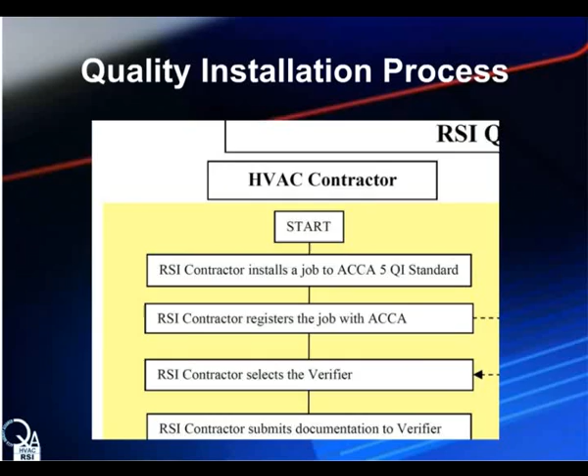Next, let's presume the QI job has been installed. Therefore, the job's documentation is to be sent to the verifier. As we saw in the last session, there is some documentation that must be forwarded to the verifier. The items required for submission are detailed in Section 1 of the Verifier Checklist.

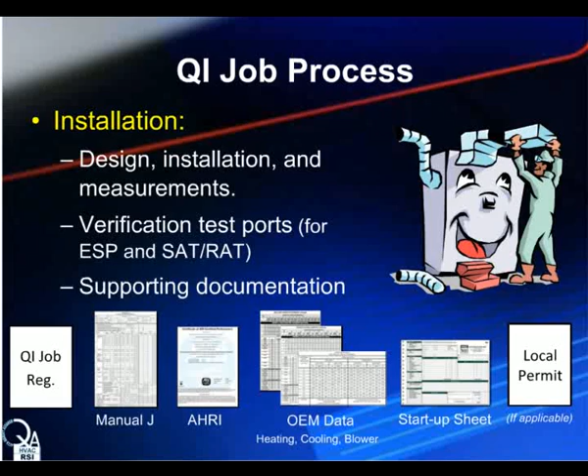Looking back at the whole flowchart to reestablish where we are in the process, let's review some of those dotted line connections. The first dotted line connection is from the RSI contractor to the QA program when the job is registered. A copy of the registration form will be part of the information submitted with the QI job documentation. The other dotted line represents the link between the RSI contractor, the verifier, and the QA program, because verifiers will be listed on the directory hosted by the QA program administrator.

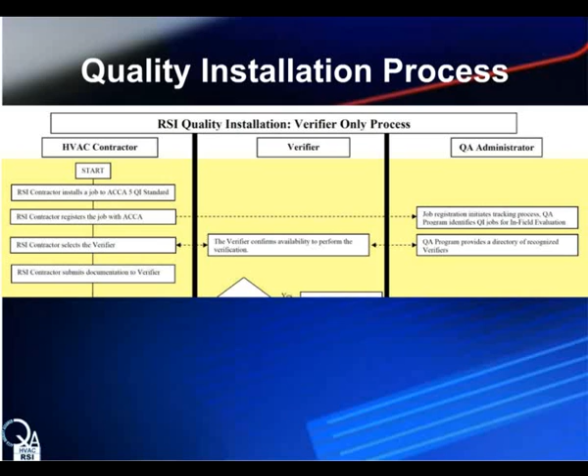So, revisiting the initial steps of the program, after the job is finished, registered, the verifier is coordinated, and the documentation has been forwarded, we will then look at the verification process.

This slide is a bit chopped up in an attempt to display the lanes of responsibility, but we'll pick up where we left off. The documentation has been submitted to the verifier. If the job is selected for an in-field evaluation, then the first Verifier Checklist, the installation file review, will be completed. Then the verifier will coordinate with the contractor and the customer to conduct the in-field evaluation. And then the second Verifier Checklist, the in-field evaluation, will be completed.

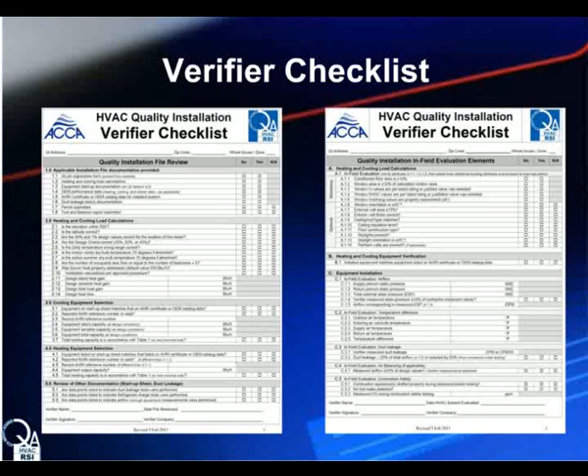This part of the process is not required to flow only in this way. It is possible that the RSI contractor will coordinate to have the verifier on site as the job is being finished. At that time, certain measurements and observations can be documented and incorporated into the final report. As the relationship between the RSI contractor and the verifier develops, it is anticipated that this process will smooth out into an almost seamless event.

The other path, when competence has been demonstrated, is for only the installation file review to be performed. Regardless of the path that is followed, at the end, the QI job either met the minimum requirements and the path continues to the right, or there were elements that required remediation and the path leads to the left.

As a reminder from the previous session, initially 3 consecutive jobs must meet the minimum requirements of an in-field evaluation. Then, 1 in 10 jobs will receive this level of evaluation. And every QI job installation file will be reviewed by a verifier.

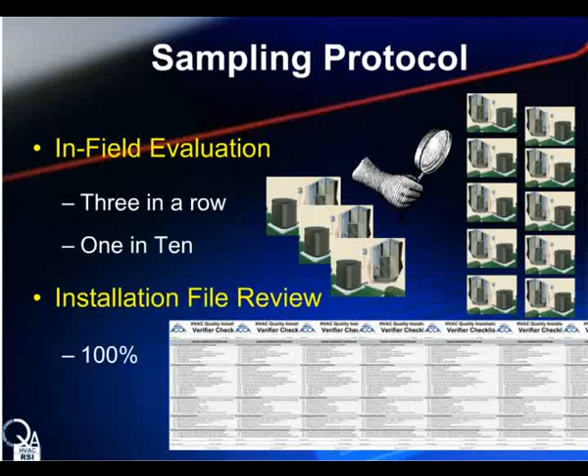If there are elements that require remediation, the verifier simply informs the RSI contractor so they can be corrected. When the corrections have been effected, the documentation is resubmitted, or for jobs that require an in-field evaluation, an additional site visit is coordinated. The goal of the program is simply to promote quality HVAC installations. The program also seeks to treat people as adults. So if there's something that needs to be fixed, let's get it fixed, and then confirm that it was fixed.

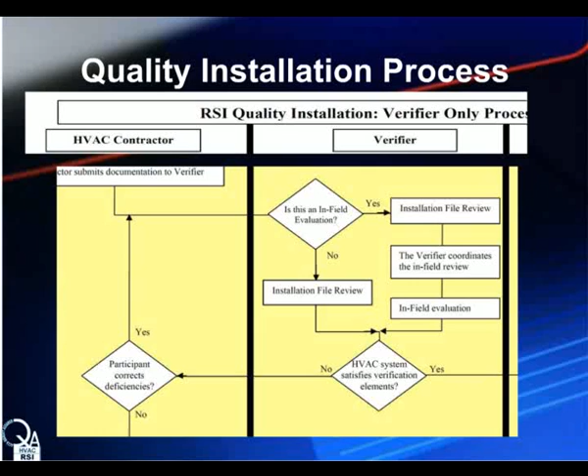The next part of the flowchart looks at what happens when things go well and what happens when they don't. If the contractor cannot or will not correct the deficiencies, then the QA program will take the appropriate action. This process is really very similar to the action taken when a verifier has a similar episode of noncompliance, and it will be covered in more detail during the next session.

However, as you can see by the swim lanes, the responsibility of the verifier is simply to report their findings. They do not need to take ownership of the problem. Simply report it to the QA program.

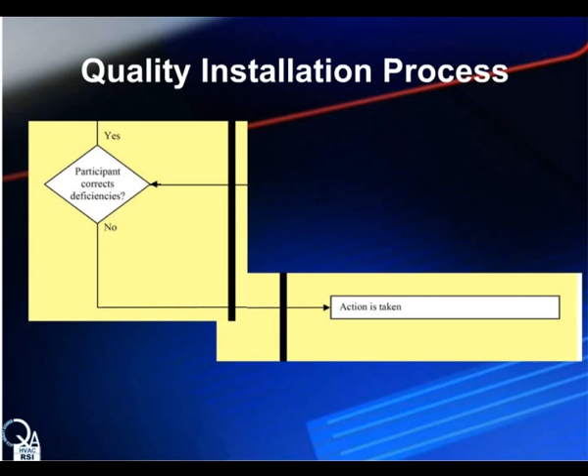In addition to any corrective action that may be taken, the RSI contractor that must leave a registered QI job unfinished, or with remaining elements requiring remediation, must also revert to the higher level of oversight until competence can be reestablished. So 3 consecutive registered QI jobs must be completed before the sampling protocol is reinstated.

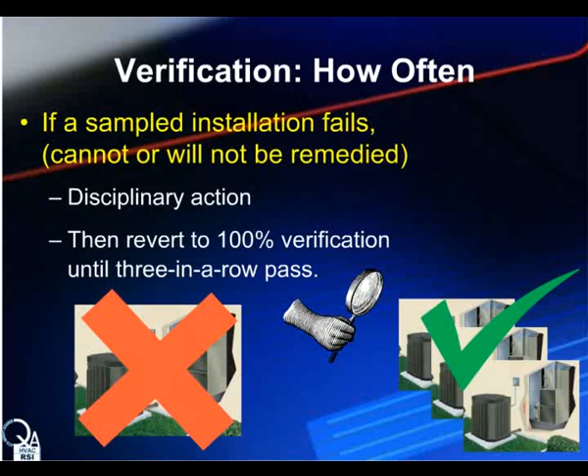Since this process is the one that will be followed much more often, we'll talk a bit more about when things go right. After the job checks out, the verifier submits the necessary documentation electronically to the QA program.

This process will evolve and change. As it does, further instruction will be provided.

Then the QA program administrator will review the submitted documentation and, when appropriate, issue the appropriate form of recognition to the RSI contractor, or, at the contractor's discretion, to the customer. It is also anticipated that a directory of QI jobs or some form of recognition will also be provided for RSI contractors who display a high level of quality work.

That was a whirlwind tour of the QI job process when using a verifier. It was acknowledged that this program will require some time to populate the country with a cadre of tested or NATE certified verifiers.

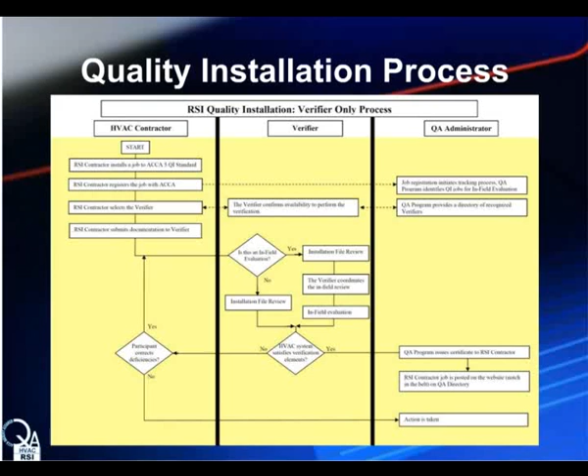Therefore, in the interim, a company may use an employee, a manager, or a member of another installation team, who is not involved in the design or installation of the HVAC system and who has passed the same test or achieved the same NATE credential.

For companies that employ an evaluator, there's a slightly different process. For companies that use their evaluator to perform the in-field evaluation, a slightly different flowchart is used. It picks up right after the RSI contractor registers the job.

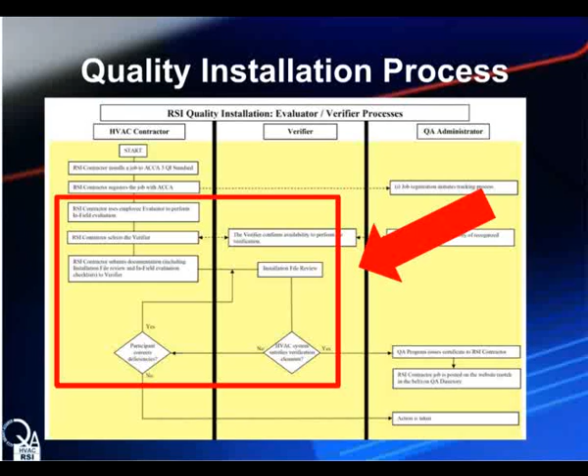Instead of calling the verifier, the RSI contractor will dispatch their evaluator to conduct the in-field evaluation. Until there are verifiers available to offer an objective third-party evaluation, the RSI contractor must use their company evaluator for every registered QI job. The in-field evaluation checklist is then forwarded with the other documentation to the verifier for the installation file review.

As with the previous flowchart, the RSI contractor will have the opportunity to resolve any discrepancies with the installation.

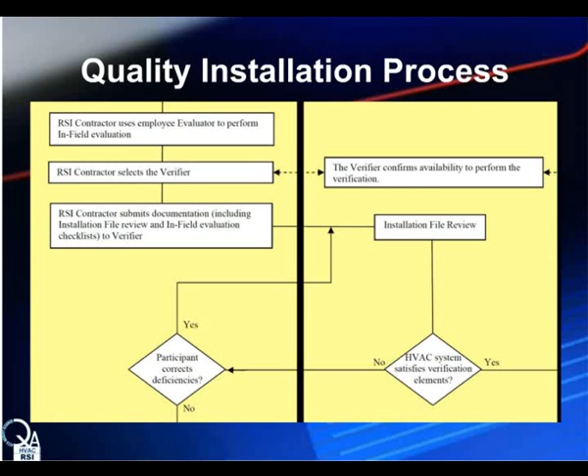Some additional requirements for the RSI contractor: in order to participate in the program, QI jobs must be performed. They must be completed during their year of recognition, and since that date may be abbreviated due to participation in other programs, the first year requirement is only for 2 jobs. Every year of accreditation after that must have 5 registered QI jobs, or the person will be delisted for a 6-month period.

The purpose of the program is to effect quality HVAC installations. So if you see something that is out of compliance, let the RSI contractor who volunteered to serve in this program know what's going on.

A lot of hard work went into making the evaluation of HVAC systems as objective as possible. All we ask is for a technically competent person to effect the evaluations. The verifier is expected to observe, measure, and report. There's no need to take responsibility for the job, only for reporting what's been found.

This is applicable to evaluators too. You are expected to represent your company and this program to the customer, offering an unbiased opinion of the work that was done.